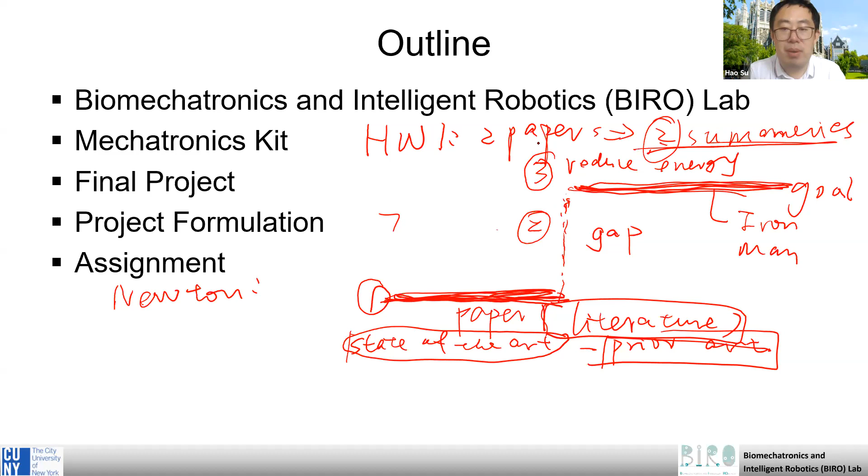Okay, if not, I will move to the next section, and let's go over the details of today's lecture.

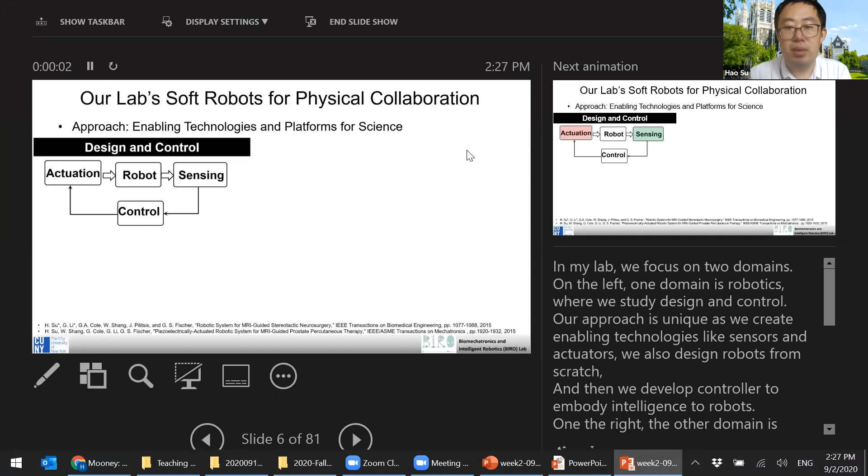And let's go back to the lecture and switch to the view. So you can see, okay. So I want to talk a little bit about my lab research, so you can get some sense of what my lab does, and also it's a representation about the state of the art of robotics, right?

For example, we develop enabling technology and robot platforms. On one hand, when I talk about enabling technology, I mean actuators, sensors, and those basic components, right? And we also work on robot design. We design robots from scratch, right? So we don't buy robots, we design them ourselves. We also develop controllers, which is like a smarter algorithm to make the robot, like some students said, AI powered robotics, right? This kind of AI stuff.

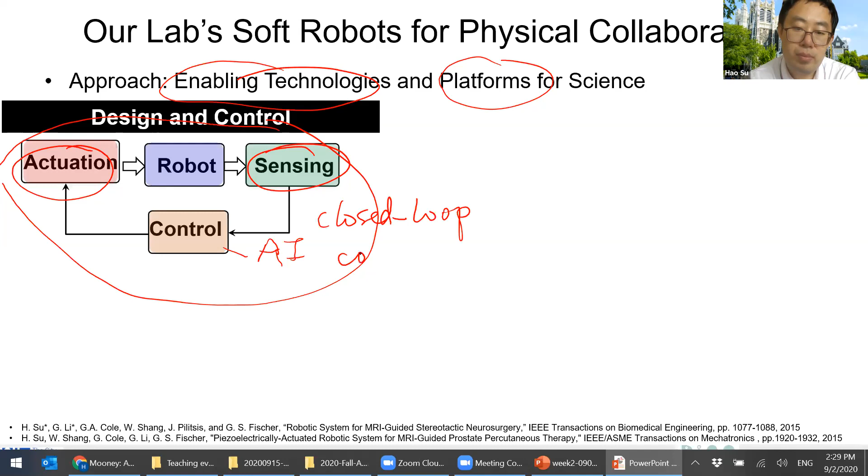So I really want you to remember this diagram, because, do you know what this is called? It's called what? Anyone in 411, do you know what this is called? Do you remember what this diagram is? Any? Is it a box diagram? Block diagram? No. Anyone from 411 know what this diagram is? Anyone else? Most of you learned 411, right? I don't know, it looks like a flow chart to me. It's called motor control, closed loop.

So I think you probably don't appreciate this, right, and you probably think, oh, it's just a flow chart. But for you who already took 411, you should know this is called a closed loop control diagram, also called feedback control, a feedback control diagram, right? What I want to share with you is, I really want you to remember this, because I think this is the most important diagram in robotics and control. When you start to work on robotics, you really appreciate this diagram, because it tells you the big picture of how a robot works, right?

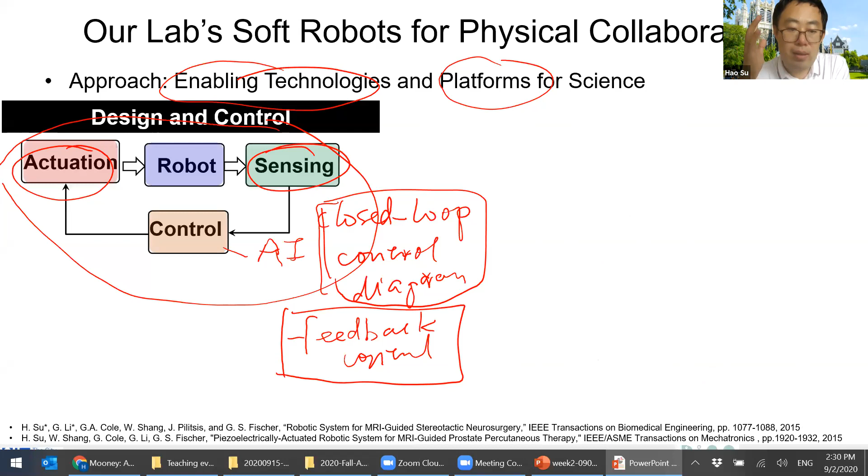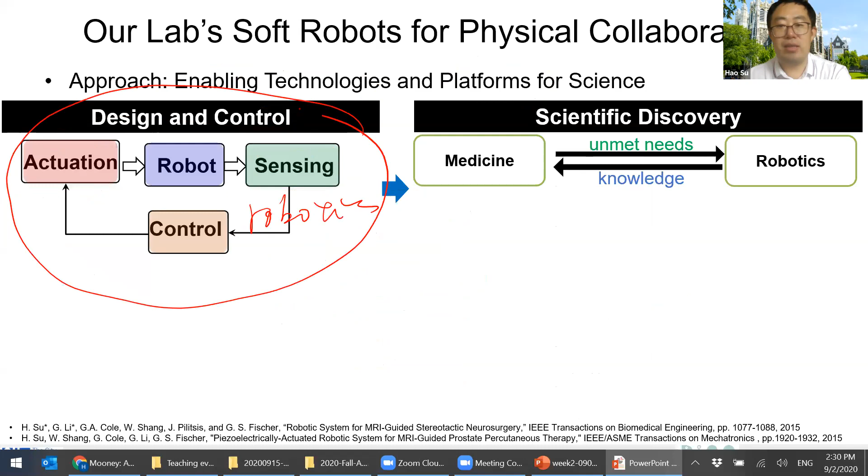So on the other hand, on the left, we see this domain is called robotics, right? This domain. On the right, we call it scientific discovery. So we develop robots, we call them bio-inspired robots, like a bio-inspired exoskeleton, for example, right? And we learn from medicine and understand some problems, right? And I told you, we want to understand the gap, and we develop some robots.

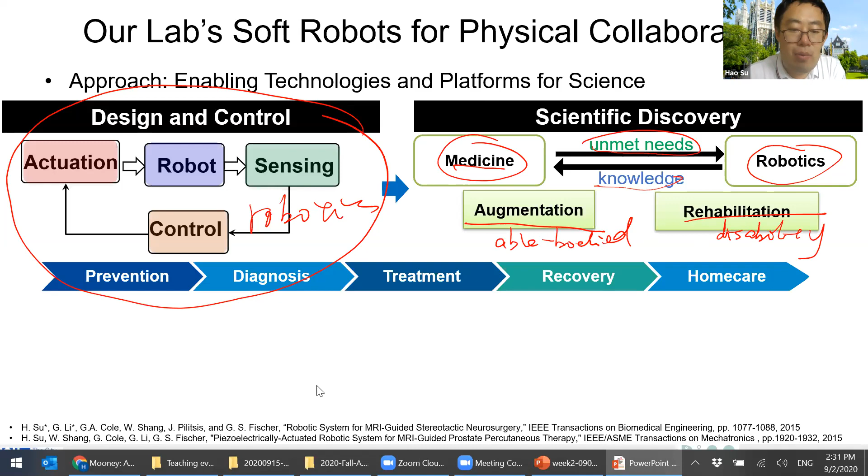On the other hand, we also use the robot as a tool to study, to investigate the medicine, to study how we can do better to solve some medical problem, right? Like help people to walk better. We study augmentation for able-bodied people, and also rehab for people with disability. So that's my lab's task, that's our research. We actually cover a very broad spectrum in the continuum of care, from disease prevention, for example, this exoskeleton, to prevent musculoskeletal injuries for workers.

We also work on an exoskeleton for recovery and home care. We want the robot to be used at home, but right now most exoskeletons can only be used in lab settings. They are not really designed for home applications, so that's a gap in this research area, and that's what we are trying to make better.

We use a soft robot approach, so it's lightweight, more comfortable, for both adults and children. Any question? Okay, so far so good.

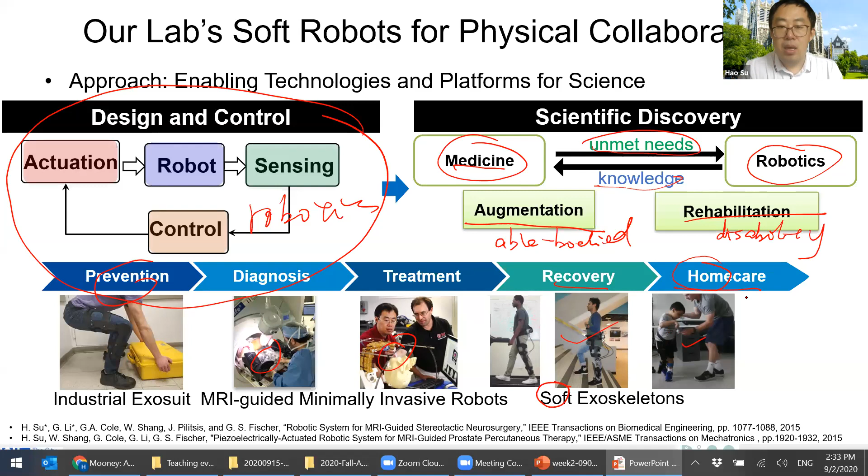We study two types of robot. There are many ways to classify robot. One way is a rigid robot, the other is a soft robot. That's kind of like a simple solution.

This is rigid material robot. I think you have seen some industrial robots - it's a metal linkage, made from rigid components. So it's called a rigid robot.

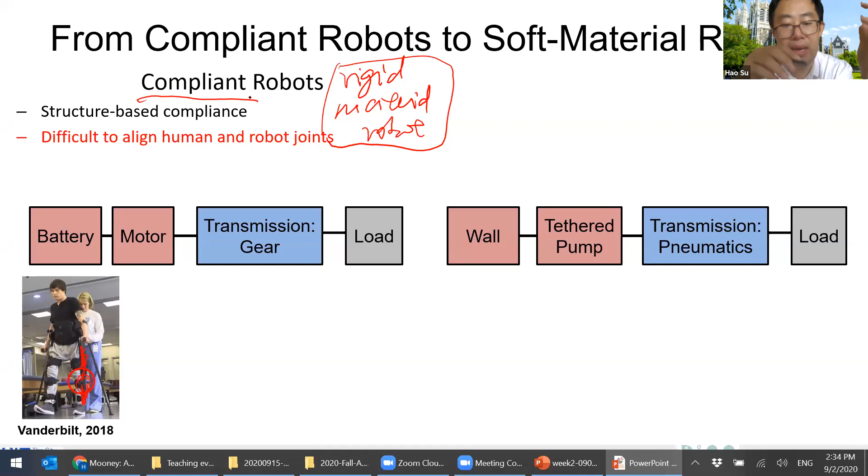But a rigid robot, like this exoskeleton - you can see the person is wearing exoskeleton. This is a linkage, this is another linkage, one on the side, one on the shaft, and then there's a joint here. It's a rigid robot, the material is rigid, but they can be kind of compliant. You can kind of move it, make it pretty compliant. It's rigid, but you can make it behave with some compliance.

Inside this robot we have a battery. In the back, the person carries the battery, also has the motors, and somewhere here the motor is, drives it. Next to the motor, the motor is also attached to some kind of gear - typically a pair, gear 1 and gear 2. This is called a transmission.

In the end, the robot needs to carry a load. In this case, what's the load of this robot? This is the exoskeleton robot. The human? Can you be more specific - human what? The body, the weight of the human? More precisely, someone said the limbs - the human limb. So the load in this case is a human limb, the robot drives a human limb. That's the load in this case.

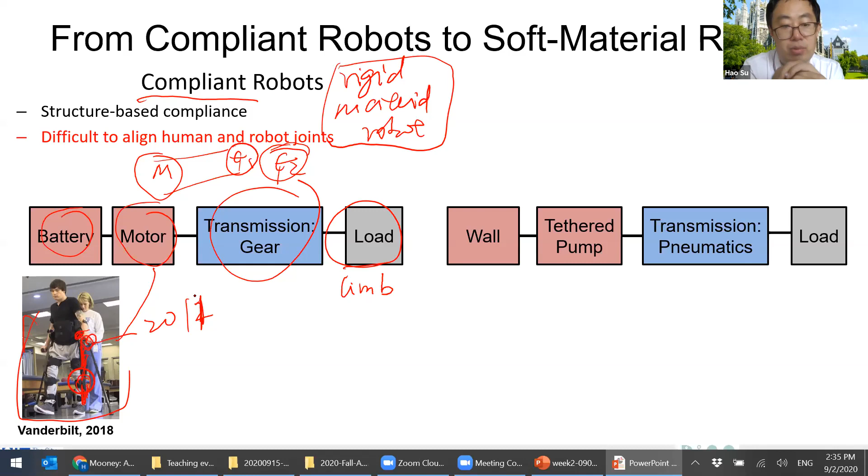But it's certainly a nice robot. It was developed about 10 years ago, I think 2011, around that, from Vanderbilt University. Right now it's a commercial product. This is a recent version, but the original version is about 10 years old.

But there's one limitation. If you think about the robot linkage, and you think about the human joints - what's the limitation? There's something like one problem with this rigid robot. Can you think of some limitation of this robot? You can roughly see the robot - it's kind of like the angles that it can turn.

It won't be about exactly his joints or something like that? Can you say that again? Like it won't be exactly where the joints would be? Yeah, very good, thank you, good answer. So it's difficult to align the human joint with the robot joint. Think about that - if you just attach two metal pieces together with a linkage in the middle, and you attach that to your knee, to attach those two linkages to yourself.

This link and this link, right? These two links, do you feel very comfortable? Very likely not, because it's rigid, and also there's a joint misalignment. It's really hard to align this joint with the human joint. So it's pretty tough to align them together, or let's say it's impossible, because a biological human joint is more complicated than a simple robot revolute joint, right? This is called a revolute joint, so it's just a hinge.

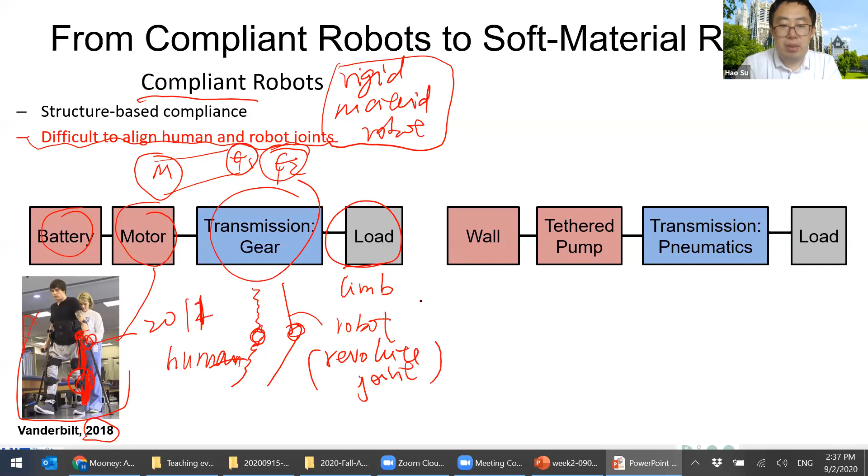So to solve this problem, as I mentioned, there's a second category of robots, it's a soft robot, using soft materials. Because the material itself is soft, we can use rubber, fabric. This is the most popular research area in robotics right now.

For example, in this case, this kind of crimson color, red piece is made of a rubber elastomer. This robot, it's not very easy to see, but it's kind of like an air bladder, like a balloon. So it's a balloon-based robot.

So why does this kind of robot have this issue? Why is this not good, but this kind of robot is good? Do you know why? There's no joint misalignment issue. Any idea why it has this nice property, why the soft robot doesn't have this joint misalignment issue?

It's malleable. It changes shape. Yes, it changes shape, but why? It assists the movement of the person. Yes, but it's elastic. Yeah, elastic is one reason, but could it be more specific? The material characteristics of this material are better than the other one.

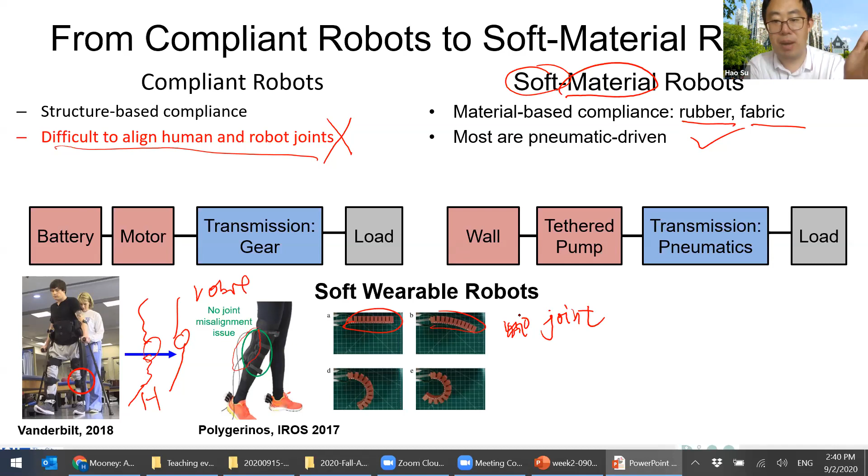So by thinking of this, if you look at the state-of-the-art soft robots, there are many different kinds. Anything that you can imagine as a rigid robot, you can essentially make a soft robot version. But there are several major limitations of those robots.

First, you see, it has a pump here - a big pump - and it needs an air pump to drive it. And here is the air hose, so to drive this. The second limitation of this robot - what's the limitation?

Can you see the limitation of this kind of squishy crawling robot? It doesn't seem like if it were to have a load vertically, it wouldn't be able to sustain it. Right, because of the weight - it's weak, and also it's slow. If there's any emergency and you want the robot to come do some rescue, you probably don't want to rely on this kind of robot - it's too slow. So that's exactly the limitation of those robots.

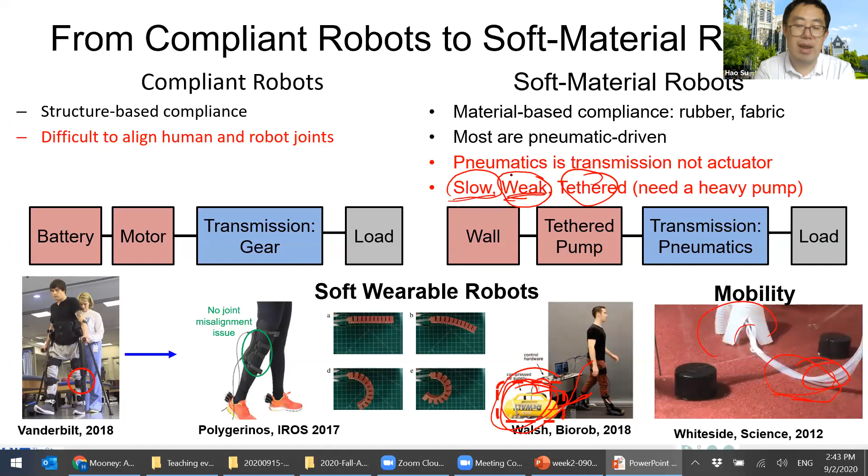So the first limitation is tether - they all have a tether, and it's slow. It's slowly crawling, and also it's weak. Those are the limitations of soft robots.

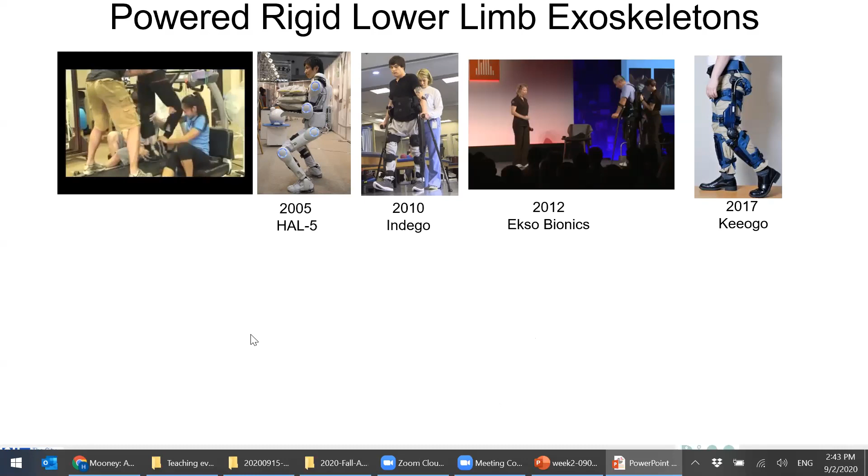Perhaps because some people that are disabled don't have the physical strength to be able to move and use the one on the far left. So the one on the right, I guess, would be a precursor to the one on the left. Yeah, so that's one benefit, right?

Another benefit is, in this case, how many people are here to help the person to move? Three, right? You know, it's expensive, right? And also it's labor intensive, and you can only do this in a clinical setting, right?

And this is also true for this - you can only do this in a clinical setting, right? So that's why we prefer a robotic device, right?

So robots have some benefits. If we can use the robot to do this, we probably only need one physical therapist to work with this person in this case. And you can see the video, right? This is still kind of like state-of-the-art research, and even though they're not very new, they generally show that.

So this is bad, right? We don't want to do this. There's too many people, and it takes too much time. You need to go to the hospital and clinics to do the rehabilitation.

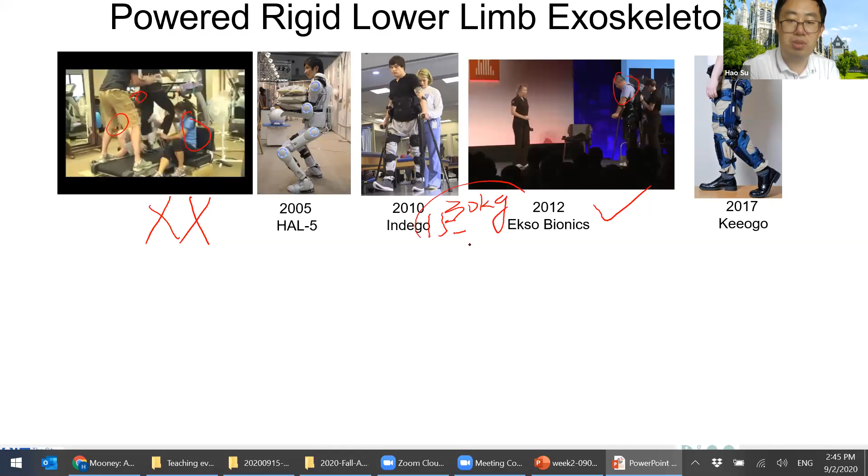And here, this is better, but only one person, maybe two people. This is kind of okay, but you still - this is about 30 kilograms. The robot mass ranges from 15 kilograms to 30 kilograms, that's like 30 pounds to 60 pounds. Super heavy, right? So this is not good.

So this one is a modular design, only has a knee joint. So this is lighter, but it's still about 10 kilograms. So you can see it has some advantages, but the main disadvantage of this robot is that it actually costs more energy for people to walk. So this is the problem.

So we want to reduce the metabolic cost, we want this energy, the energetics, to be small. But for those robots, there's no metabolic cost reduction. So those robots are like exercise machines, actually making your walking more difficult. It's only useful for people who are fully paralyzed - they cannot walk, so for people who cannot walk, this is useful, because the machine can walk for the person.

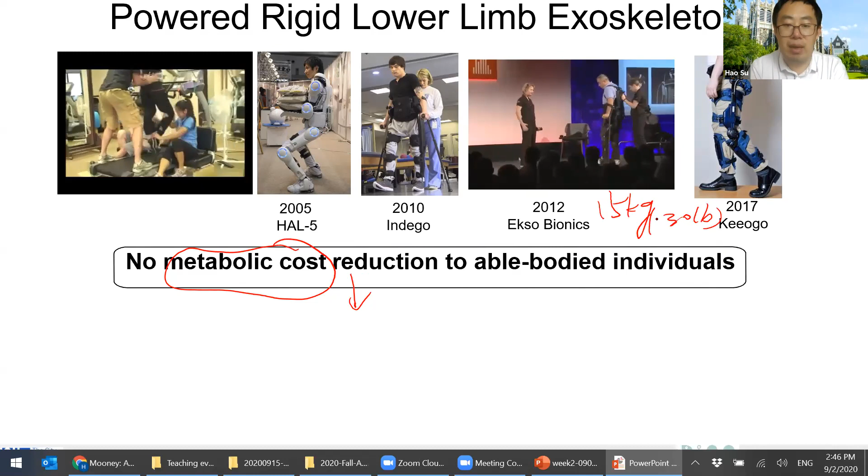But if you wear this kind of, let's say, 15 kilogram and 30 pound robot, wow, that's too heavy, right? So what are the key challenges? I think it's too heavy, too much friction. So when you wear it, you can barely move the joint, right? So the robot is not compliant.

So by this, I mean it's not compliant - you can feel a lot of friction from the robot. And the robot only moves when it's powered, right? So that's the limitation. And also we mentioned the joint misalignment issue. And then in terms of control, it enforces the person to move around, so that's also a limitation.

Enforcing the person to walk - it's not nice, right? We want to assist the person to walk. We don't want the machine to walk for you, we want the machine to help you walk. So that's kind of a minute difference, but it's very, very important.

In my lab, we develop several exoskeletons - sorry, let me reshare this video with you. So we develop several exoskeletons, and we really want to optimize a lot of features.

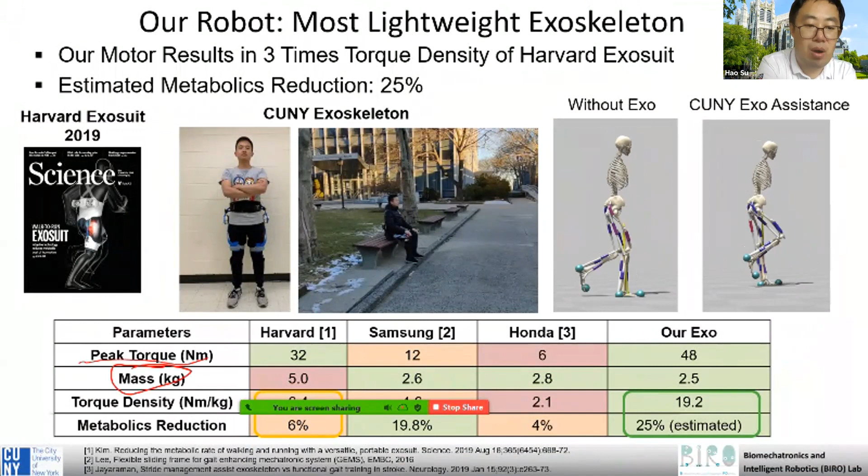So the number one thing is we want it to be really, really lightweight, so people can wear this robot at home. So lightweight, and the metric we use is the mass. We want it to be lightweight, but we also want it to generate some torque - a sufficient amount of torque to help people walk better.

And so it's not only the mass, but we also care about normalized torque - we normalize the torque by the mass, because for each kilogram of the robot, we wanted to maximize how much torque it can generate.

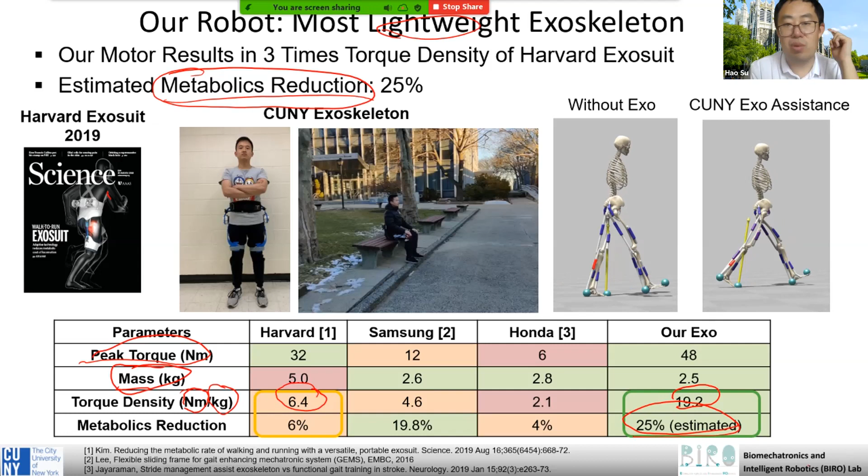So essentially we make this really lightweight, and that's the goal we want to achieve. The end goal is that we want to reduce the metabolics or energetics. We predict that our robot, because it's about 3 times the torque density compared with this robot from Harvard University, can reduce about 4 times the energetics in comparison.

So let's watch a video. We have invented a hybrid exoskeleton that is softer, powerful, and smart to help patients regain mobility.

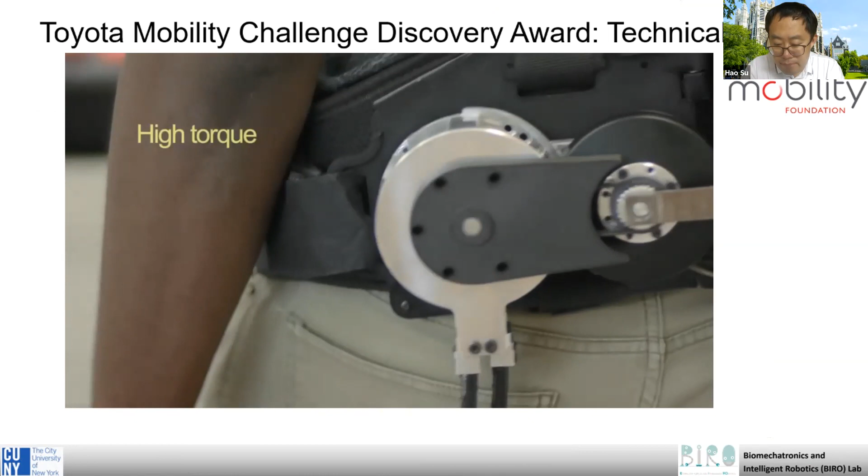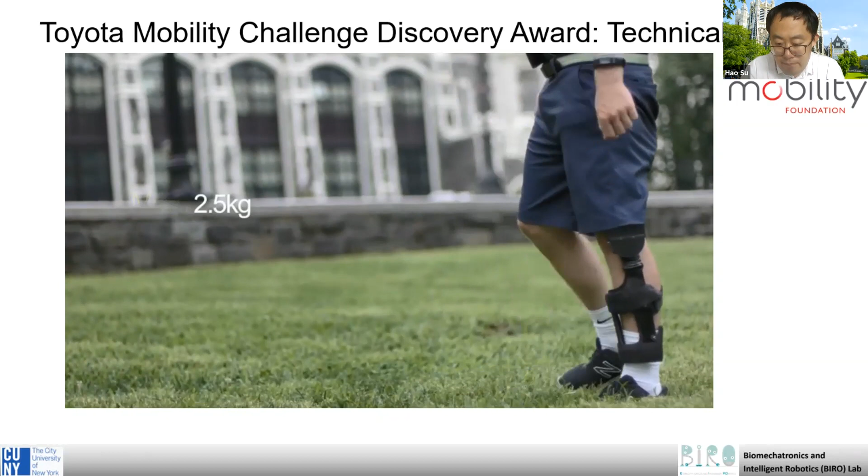Our robot combines the advantages of rigid exoskeletons and softer exosuits. Motors deliver power through soft cables to wearable structures to assist both flexion and extension motion. This is the first exoskeleton that is ultra lightweight with near zero resistance to human motion, thanks to quasi-direct drive actuation that uses high torque motors with small ratio gears.

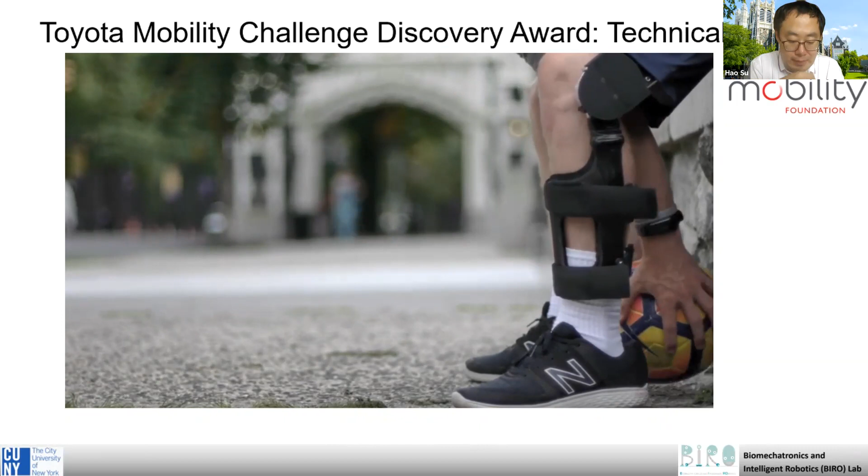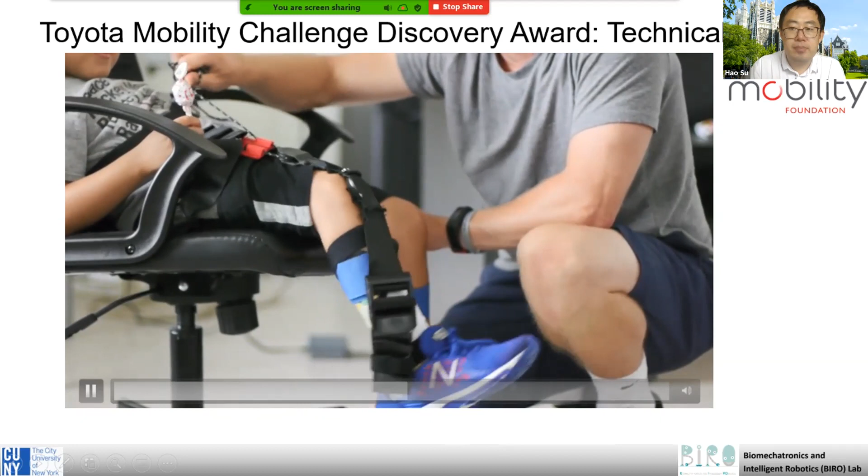The variable part is customizable using 3D scanning and 3D printed carbon fiber. Therefore, the robot fits the user very well, and it can be worn under clothing. Besides the adult exoskeleton, we also invented a pediatric version, which is purely textile-based and mimics the quad muscle. The raw material cost is under $50.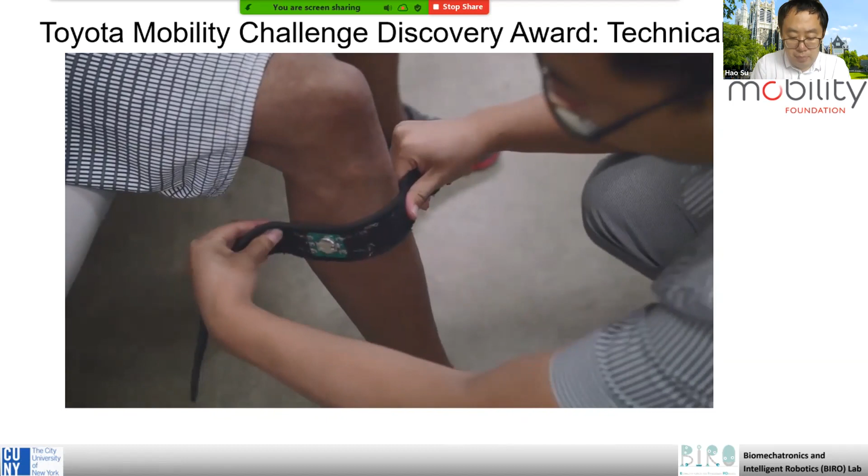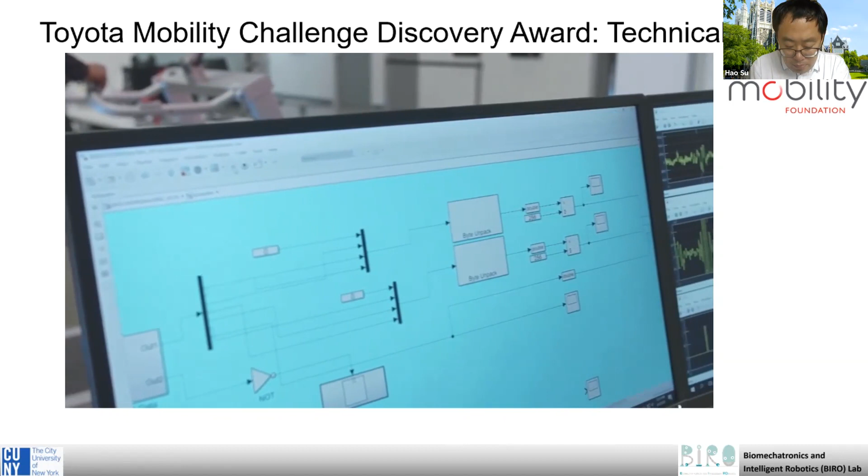Our medical center is the clinical collaborator with Dr. Su's lab. Soft EMG sensor technology is a human-machine interface that monitors the user's physiology and varies the power assistance by maximizing the use of residual or remaining function. Our group plans to conduct safety and efficacy studies to investigate the usefulness of this technology.

This new robot offers a suite of important enabling technologies, from sensors and actuators to AI, for a variety of patients with lower limb paralysis. The most promising aspect of this innovation is not only the technology itself, but the translational value, the potential for affordability, and the way the device will encourage user independence.

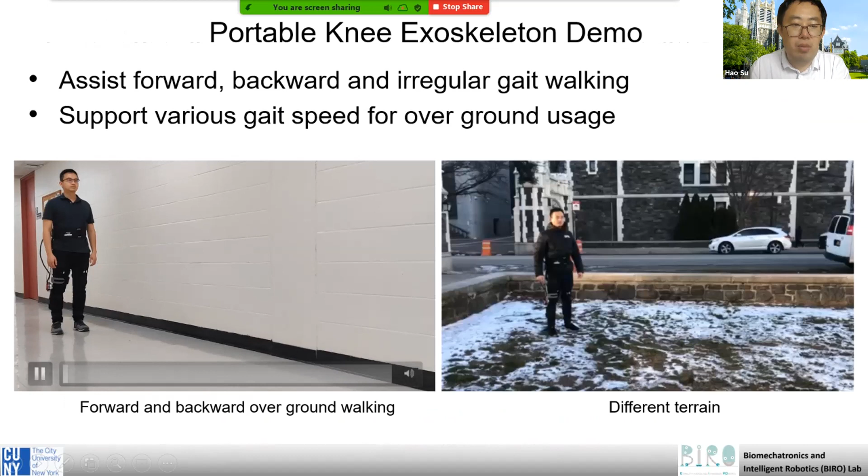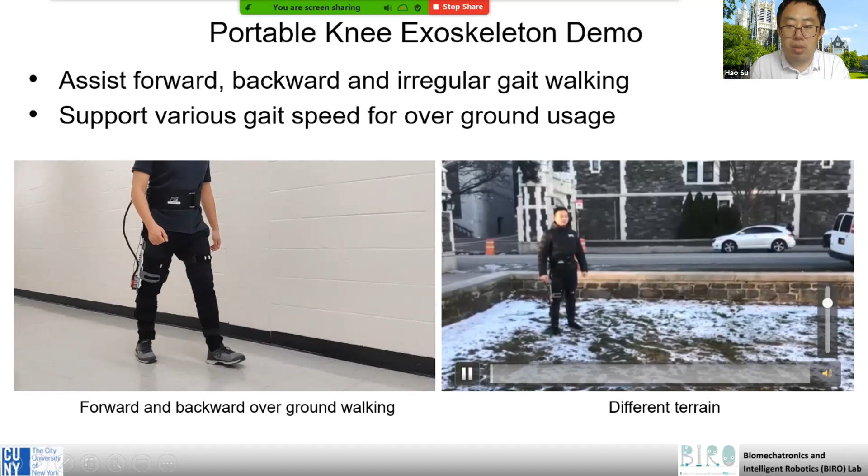I hope you get some sense of how the robot works. We also have this portable robot that can move forward and backwards when it's powered, and it can walk on a couple of different terrains, so different home-based applications.

So then I want to switch to talking about mechatronics education. As I mentioned, we really promote project-based experiential learning, and we developed this open source mechatronic kit and also a website.

We are also developing 3 soft robots, including this soft robot hand, robot cheetah, and an underwater soft robot. If you go to this website and Assistive Robot Toolbox, you can see related information, or you can go to my website, and I have the link to this website.

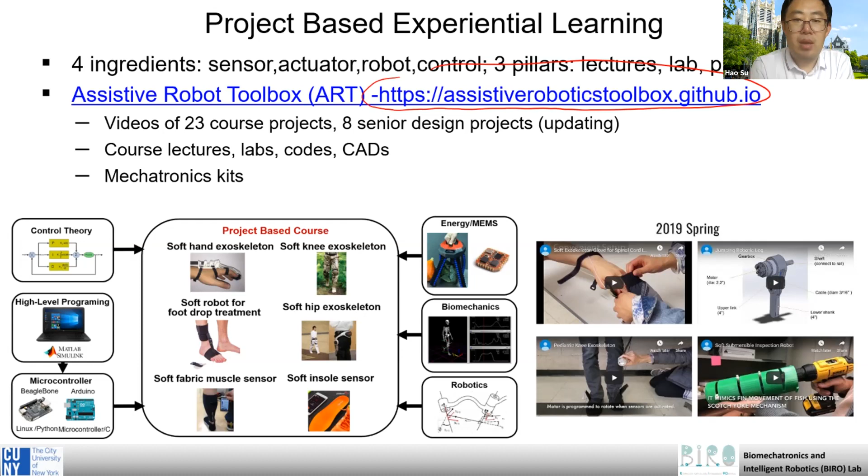In the last few years, we received a lot of awards, including international and national awards. So more than welcome for you to submit papers or competitions.

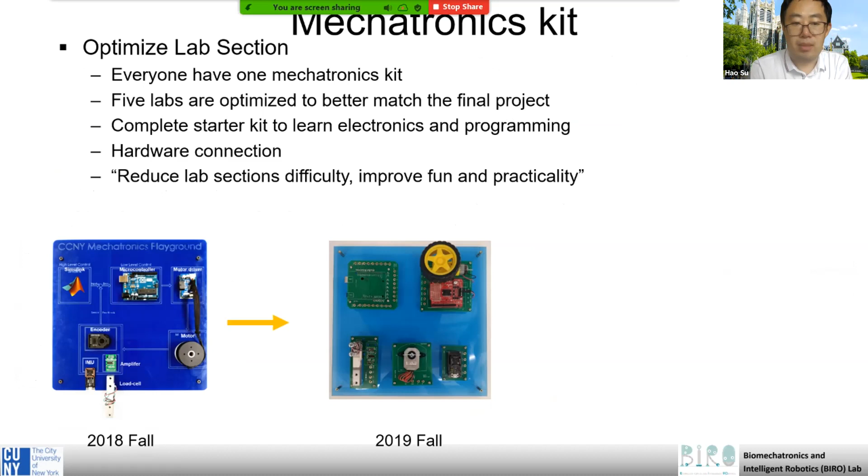And then I want to talk about the Mechatronics kit. This is our first version. The second version we developed last year is modular, so this is the modular version.

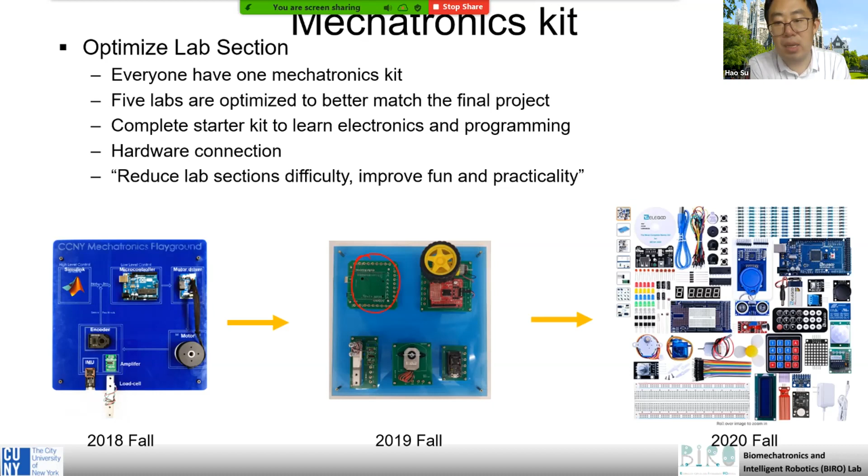The current version uses a kind of commercially available kit, but we came up with a very smart idea to do some of these kinds of products. You can do it at home.

Some nice projects we did before, for example, this origami robot. We call it an origami robot that is a foldable robot that can generate a high force. It's a high force soft robot.

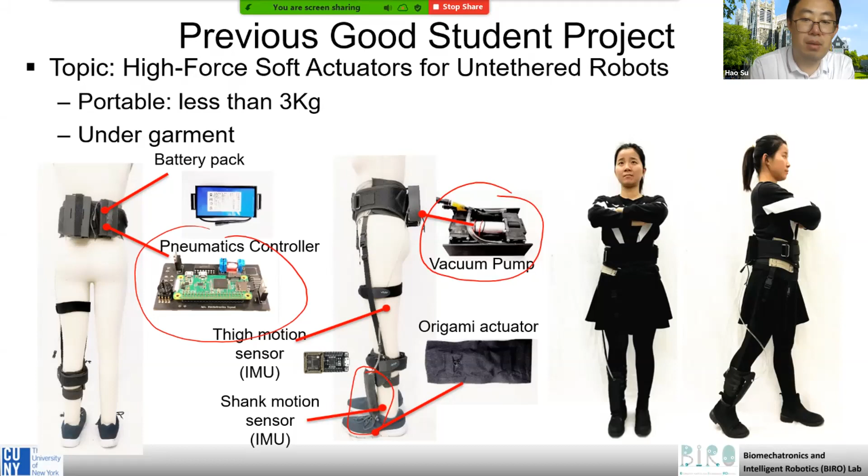Also, we use this robot design like an exosuit. It's soft because this structure itself is made of fabric, and it's pneumatically driven. We made a vacuum pump so it can draw air, and the students even made a custom circuit board, a very nice system.

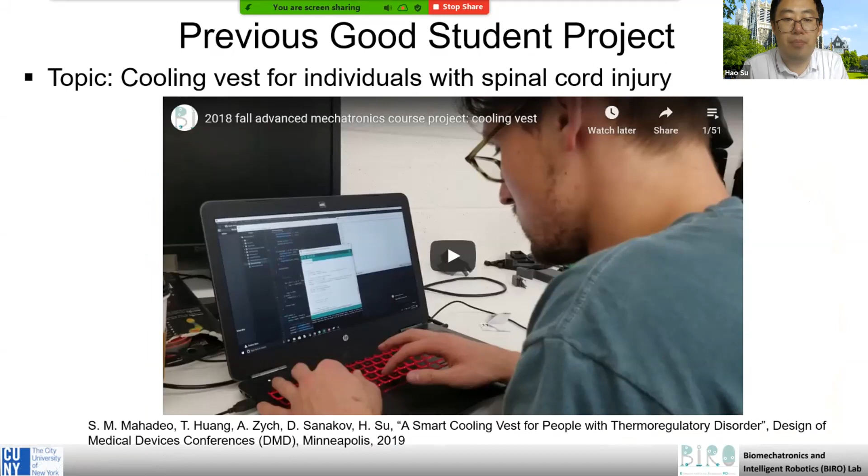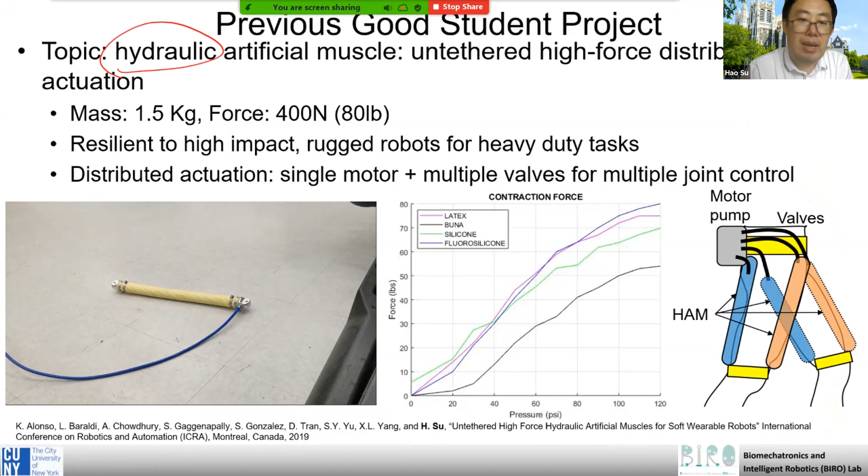If you go to the website, you can find related information there, and there are several products on the website. Another product is a hydraulic artificial muscle robot product. It can generate really high force but is very lightweight.

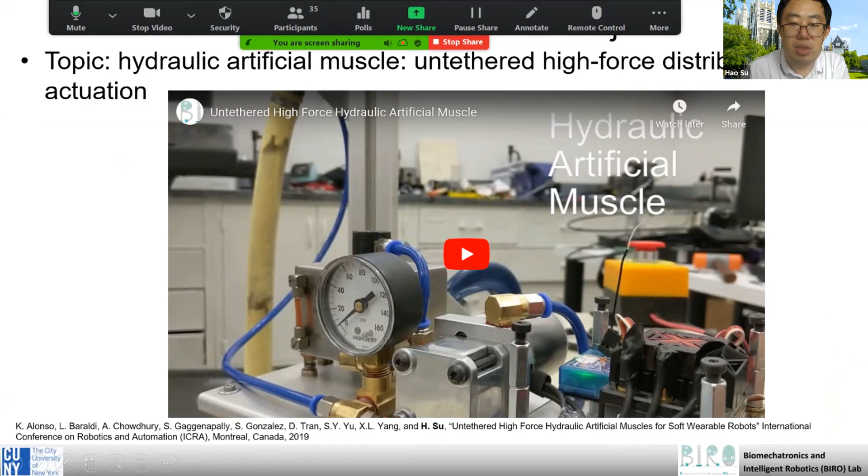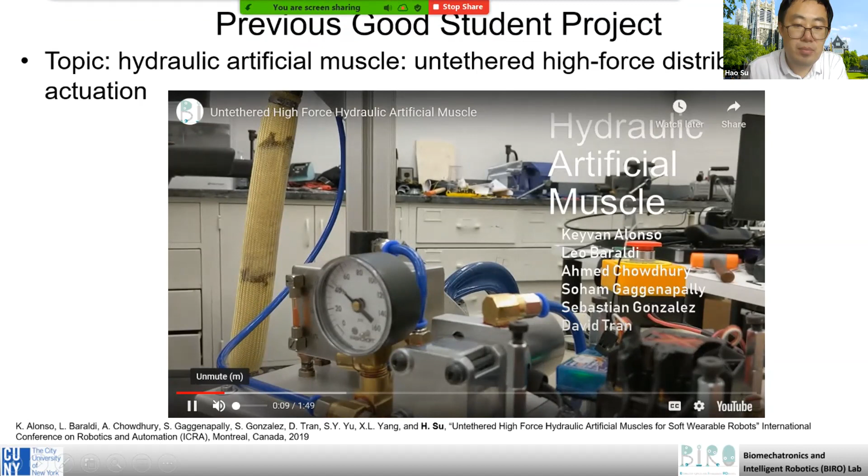This is another product, kind of an early version of this product. Let me briefly show you this video. Students designed this last semester. Any question?

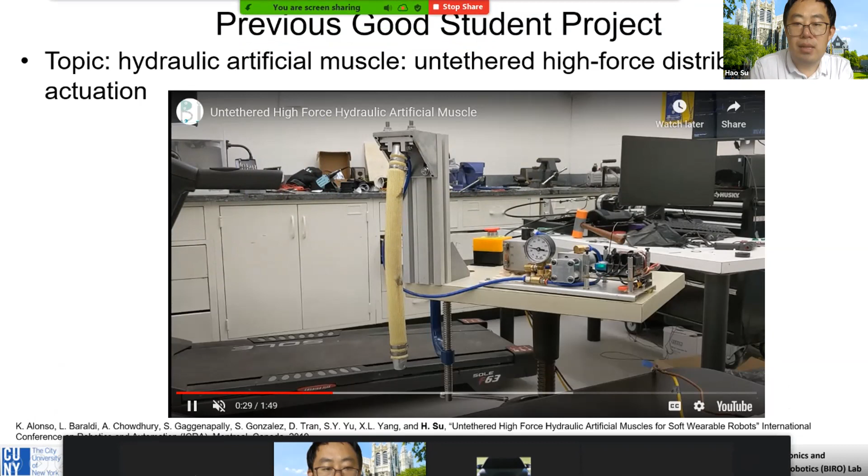So they designed all those pumps, and there's also a microcontroller on the right side here. You can roughly see a microcontroller. They designed the microcontroller, developed the coding for it, designed this hydraulic artificial muscle, and integrated all components together.

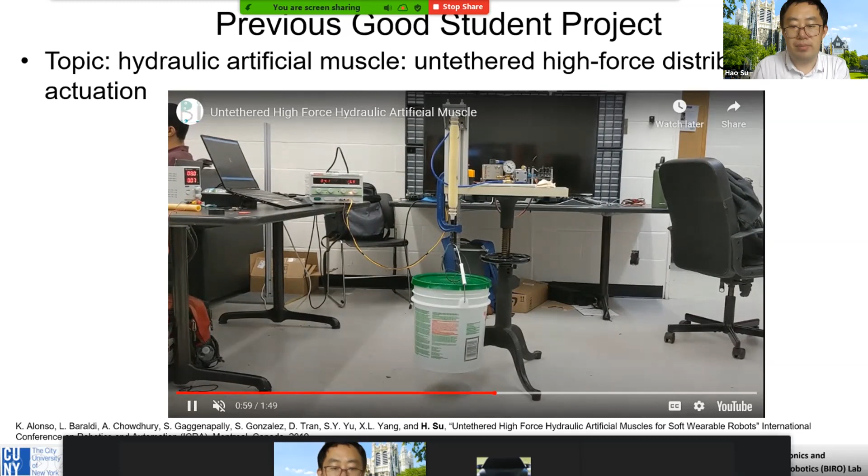So they show that it's very capable to generate high forces with this robot. They also made some very impressive demos. I'm really proud of this team, what they did.

So what you will do for this year, we came up with a very clever robot product: a powered elbow exoskeleton. It's a printable robot, so you can 3D print the hardware, and you will learn about motors, torque sensors, position control, torque control, and a virtual wall controller. This is Mechatronics, this is a controller, and also using inertial measurement units, IMU sensors, to detect human intention.

So I think it's really a cool product that you can learn something new from, even doing remote learning.

So you will design the elbow exoskeleton. You need to practice SolidWorks - this is one thing you need to do. Also assemble and test the exoskeleton. So we prepared several labs so you can do that.

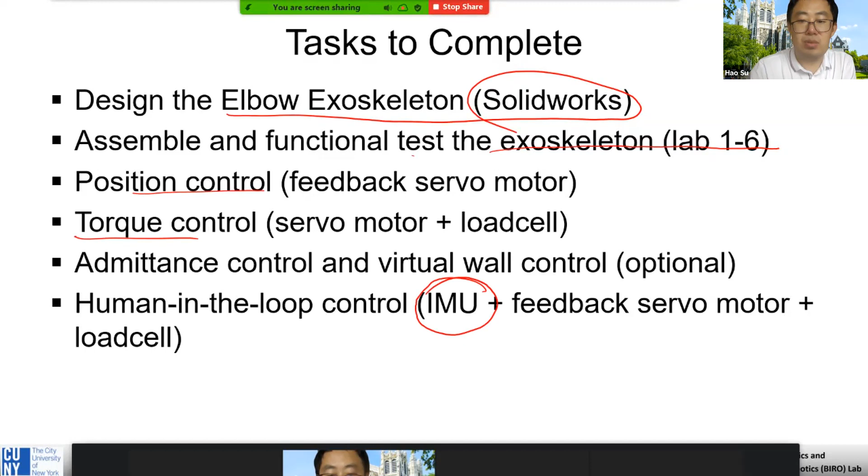And we will teach you how to do the position control and torque control of those robots, and a lot of different new controllers. We'll also teach you how to use the IMU sensors to detect human intention. Feel free to attend competitions or submit conference papers - whatever cool opportunities you can learn from previous year's projects and competitions.

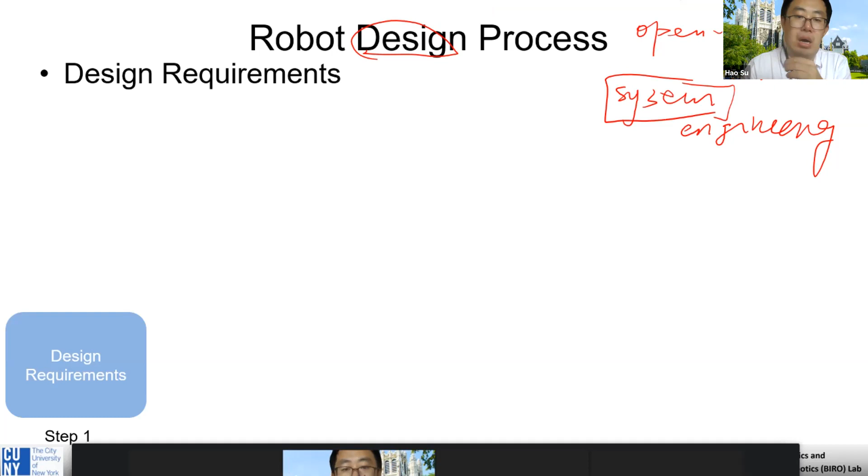But I think it's like systems engineering. By system, I mean it's not one component, it's not you design a mechanical system only - it's not one component, it's not two components. It's a mechanical system, electrical system, and also computer science. You need to combine all those three domains together. So I think that's the challenge, how to do that.

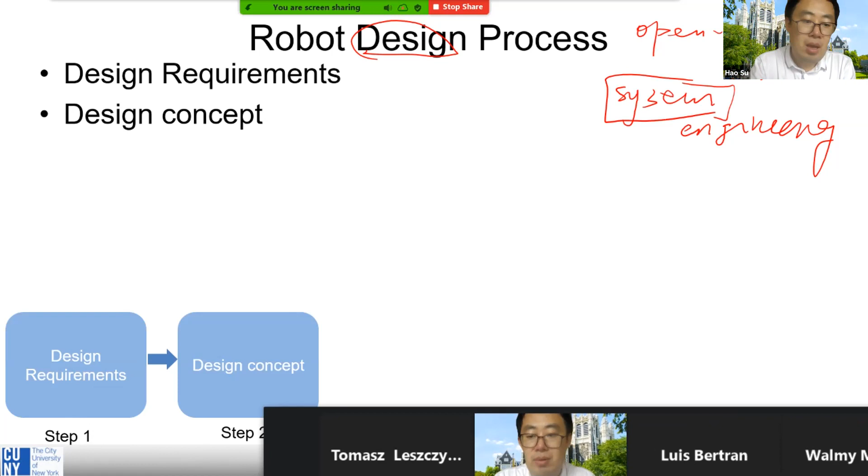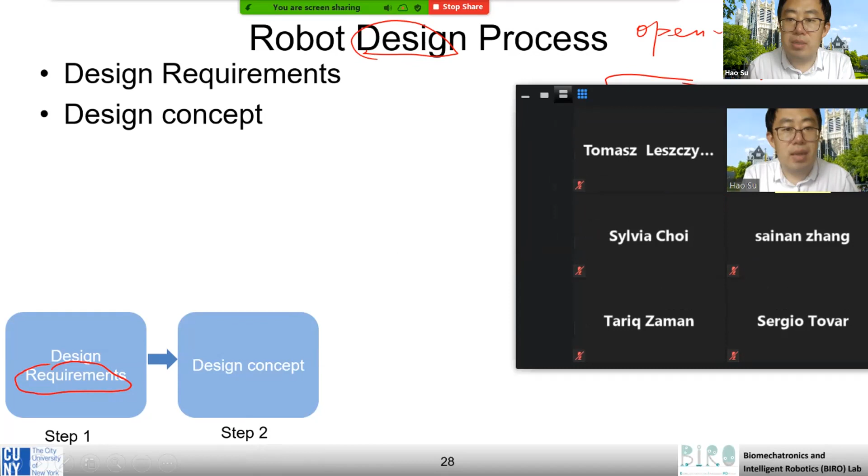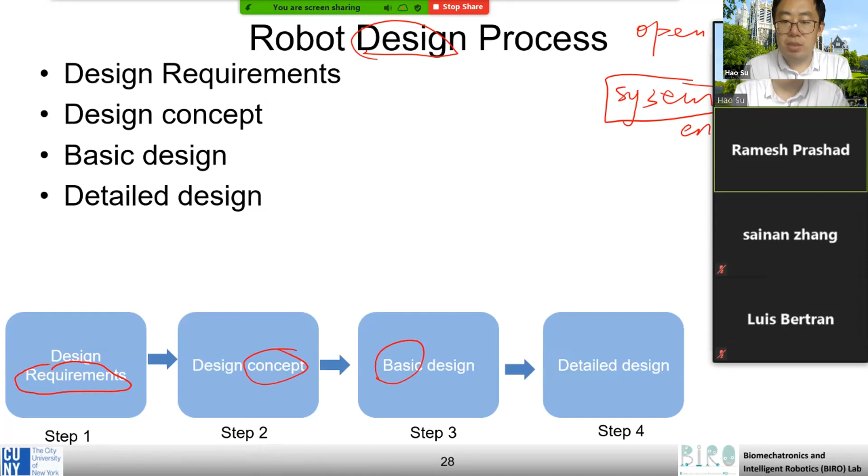So I think all the projects should start from design requirements. Understanding the design requirement is super important. And the second step is to understand - let's see, you will have some concept, then you come up with some basic design solution, then you come up with some detailed design solution.

In the end, I think you will do the manufacturing. But before you do the manufacturing, you need some approval from me so we can print the robot for you. But the caveat is I do not want you to just tell me, okay, I want to print this - I think that's not good practice. Don't jump to this detailed design directly. The right step is from step 1, 2, 3, 4, then continue until the last step, the system integration.

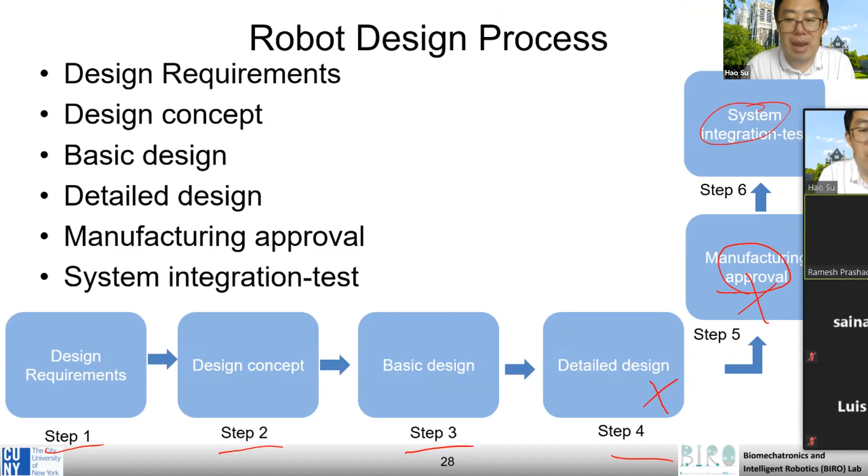So that's the key idea, and I think this maybe sounds simple, but many people still don't quite understand that - even many of my students, my postdocs, they don't quite understand how to do system design. So I will ask 2 students to go over this slide and explain what is in this slide and why it's so important. I think this order is super important for managing any robotics projects, and it's super useful for you to go over these steps.

Can 2 students - I need 2 volunteers, maybe one by one - go over this slide? Can someone go over this slide?

Ramesh, can you do it? I need 2 students. Do you just want people to read from it? Not really read, right? Based on your understanding, explain this slide, right? Luis, can you explain it? Perhaps I could try. Yeah, give it a try, please.

So for design requirements, it would be like what you need the thing to do. Right, so all the necessary things it has to do to actually be helpful or work. And for design concept, it's more like an idea of what you can do to make the project work. Like you can use this, you might be able to do this.

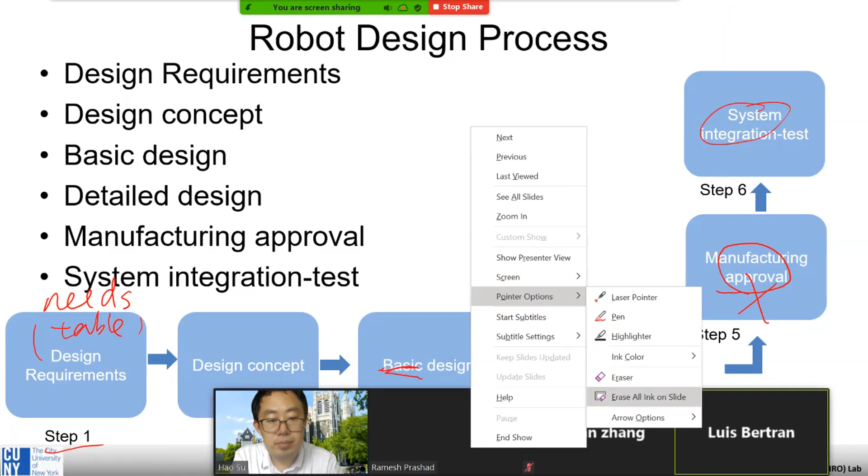And then for basic design, it would be like taking one of those concepts and trying to work something out, an image, maybe a design for it that can work, but you're not sure of yet. And then for the detailed design, you go more into the basic design, work out how that's going to work, further the design so that it satisfies all the requirements.

And then for manufacturing approval, I suppose we gotta ask you or other people that know how to do it if it's possible to be manufactured, or work out a way that you can get it manufactured. Then the system integration test, I'm not really sure about that, but it would probably be the testing, maybe programming or anything that might need it. And that's basically all I got on that.

Okay, very good, thank you. So I think the key idea is don't jump to the detailed design, right? Don't do this right away. You should start from the beginning, really understand the requirements, right?

No matter if you do this project or go to a company and work on projects as an engineer, I think it's super important to know the design requirements, right? You want to make a small robot, a large robot, the robot for an older person or a young person or a child - they are not the same, right? Don't just assume, okay, I roughly know the design.

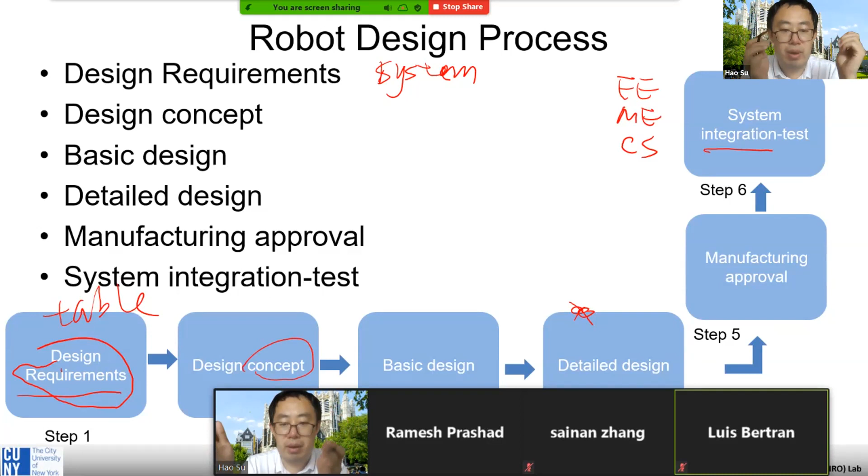But when I talk about the design concept, how can you do the design concept? What software can you use? Can someone tell me what software you can use to do the design concept?

You can use Simulink. Okay, anything else? SolidWorks. Yeah, SolidWorks, anything else? What other software do you think could show a concept, a basic drawing? What can you use? AutoCAD. AutoCAD. What about PowerPoint?

So for example, if I want to design an elbow exoskeleton, you can draw something, right? A linkage 1, linkage 2. You can draw something like this. And because this is a rigid linkage, you can draw this linkage 1 and linkage 2.

And I probably ask you one question: where do you want to put the sensors, right? So you probably will tell me, okay, if this is a robot - for example, this is a robot, and this is a human joint. This is a human, so this is a human arm. Let's say this is a human.

So you can attach this to the human through some Velcro. But where should you put the sensors? That's something you need to design. You can put a sensor - let's say this is a sensor, a rectangular shape. You can place the sensor on top of this robot, or you can place the sensor on top of the human arm, right? So there are many options.

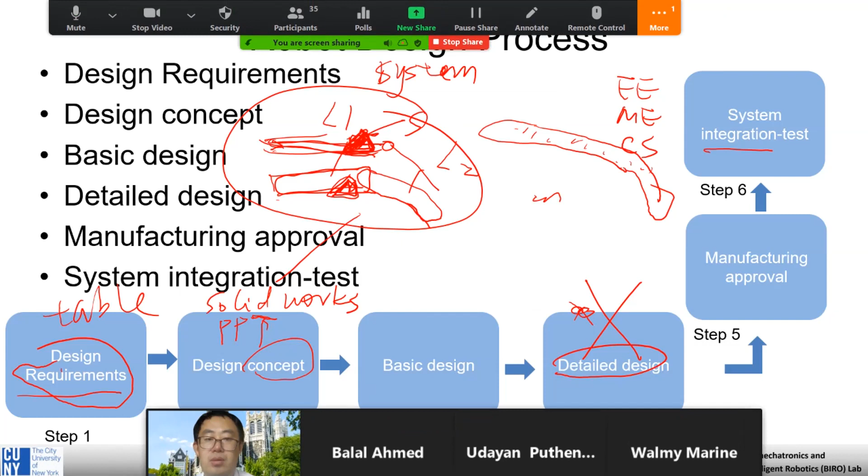Hey Professor, quick question. So you're saying you're going to 3D print this for us? Yes, so we send the drawings to you, and then you'll 3D print it.

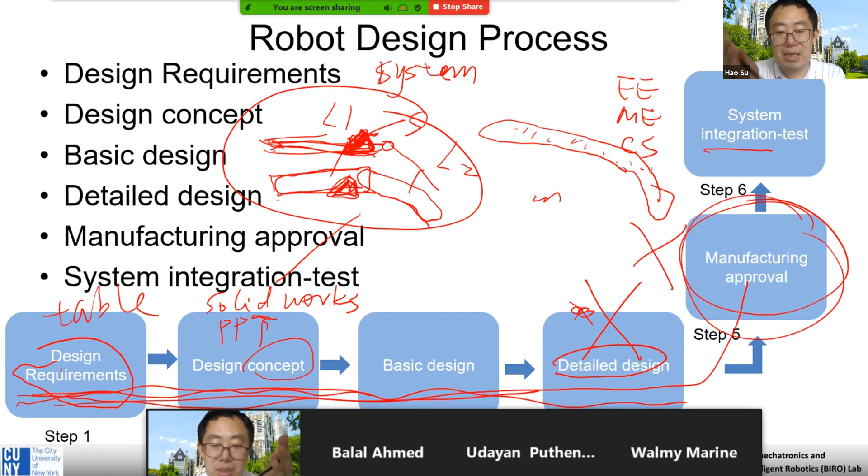Go through the design steps. Maybe I'll change my mind, maybe I want one student to really explain this. Sylvia, can you explain this diagram?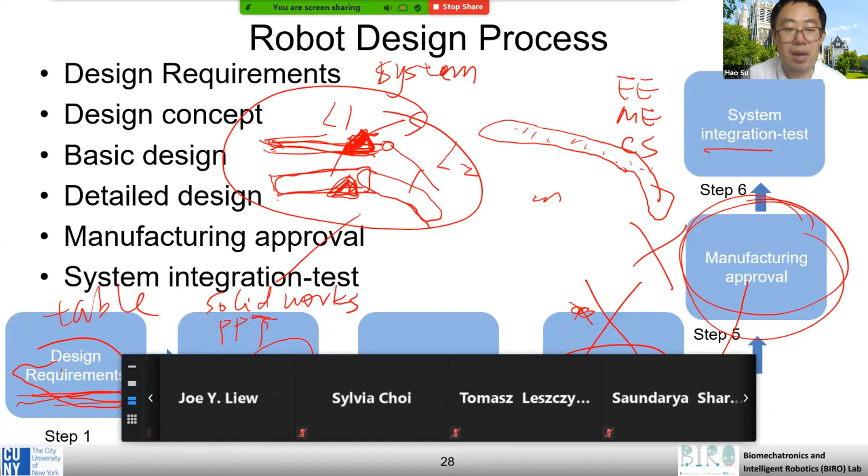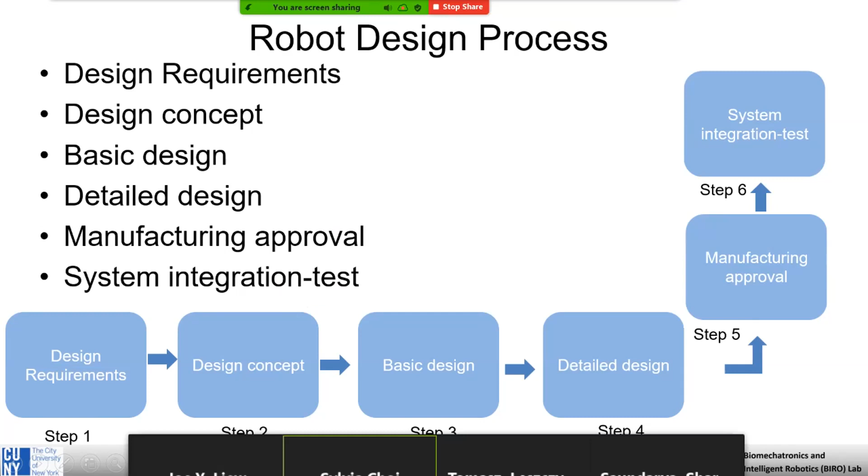Sure, yeah, okay. So first, since this is an open-ended project, we had to choose the user that we're going to design for, such as a child or an adult. And then we can also make up other design requirements, such as the cost or the size.

And then the next step is to consider the design concept. So after doing some research on the background and ideas, and learning a little more about the foundation for this class, we'll draw a simple concept design using either SolidWorks, PowerPoint, or AutoCAD. And then for basic design, we pretty much add on to that.

And when we go into detailed design, we'll consider manufacturing drawings that include fasteners and other components we may use, such as a microcontroller. And then after making manufacturing drawings, we're going to compile a report to send to the professor with all the previous steps to get manufacturing approval. However, in the report we also need to include a plan for the system integration test.

After manufacturing approval, we'll get the 3D printed prototype, and then we can do a system integration test on it. Yeah, very good.

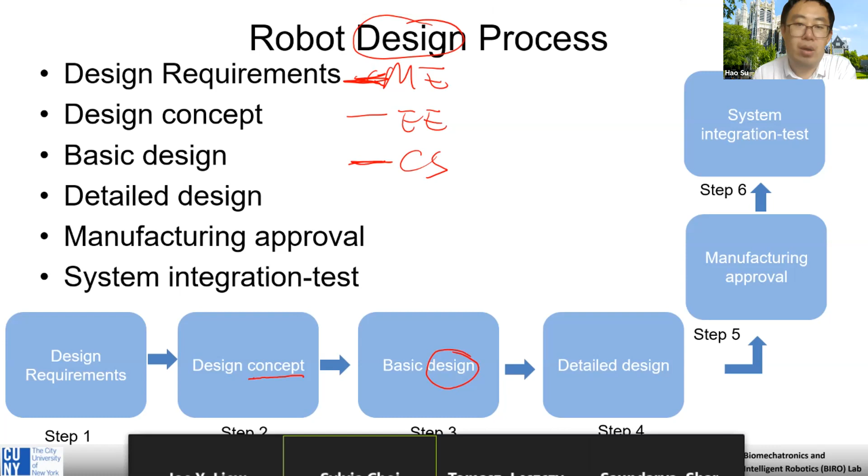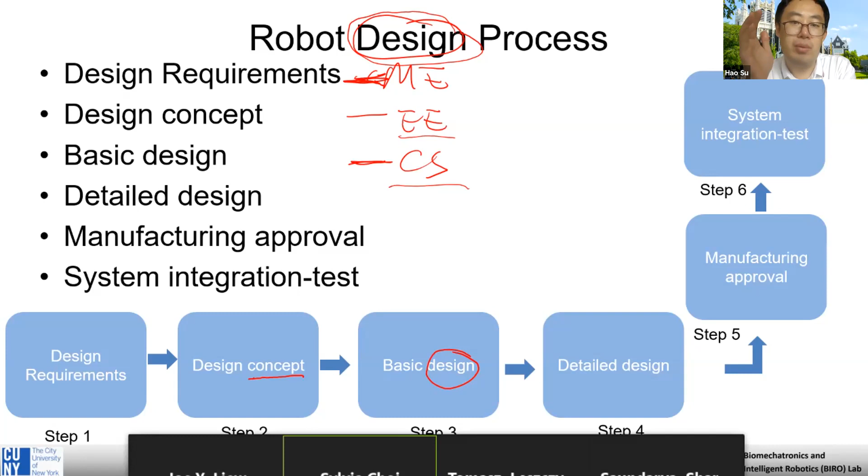Thank you. So I just want to make it very clear, when I talk about design, this is not only about the mechanical design. This includes mechanical design, electrical design, and computer programming. So we will teach you all the steps. Don't panic, and keep in mind robots include three components: ME, EE, and CS.

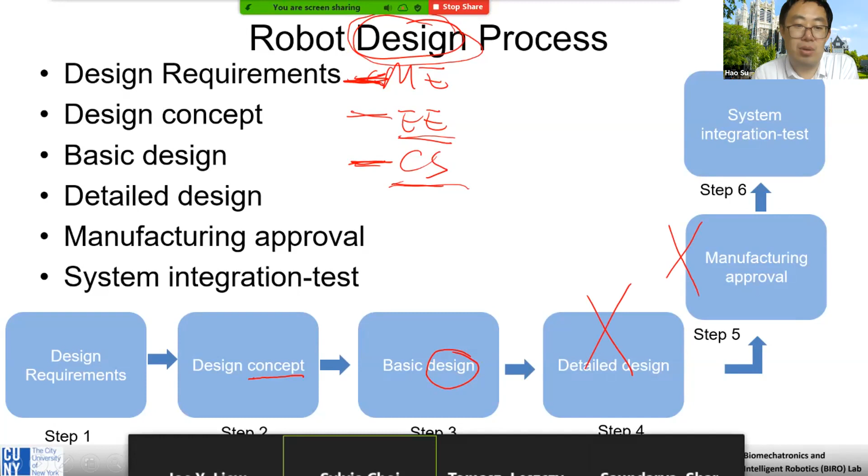So that's kind of a challenge, especially for ME students. You need to understand some EE stuff and also some CS stuff, but that's also very interesting for you to learn something new. And again, don't jump to this first. I've been repeating this several times, but I'm pretty sure some of you will keep doing it anyway, so try to avoid this, okay?

So are we, sorry Professor, are we putting, I guess that's what the next slide is, are we putting deadlines on when we need to be done with what? Okay, I guess you're going to go over that.

So we set up some milestones. We will go over some milestones with you. For example, we will start the project, and then you will do some background research.

There's a university in Switzerland that already made an exoskeleton called EDU Exo. You can go to their website, but we are actually improving their hardware, so we are having our CUNY version. Feel free to check that, but I just want to let you know.

So this is the rough plan. Any questions? Feel free to talk.

If you have your own 3D printer, feel free to print it, it's better you print it by yourself. But we have to do an individual project, to be fair. I know some of you are probably working together in groups of 3 people, but I cannot ask all students to work together, so we can't have some people individual and some people in a team.

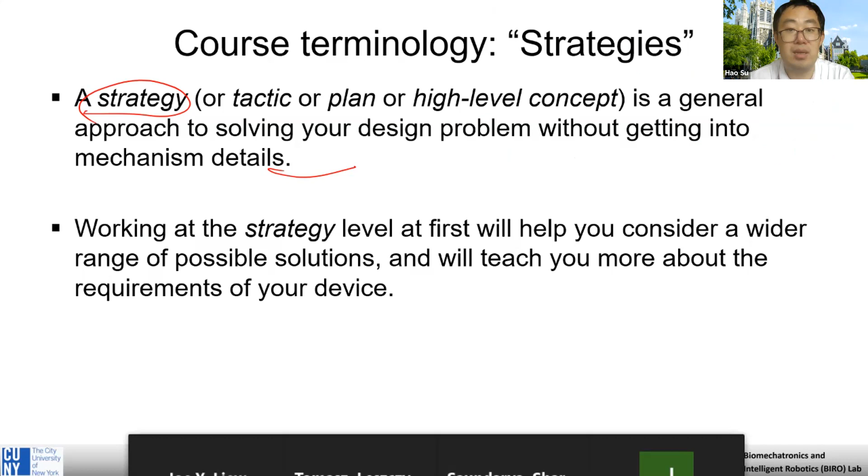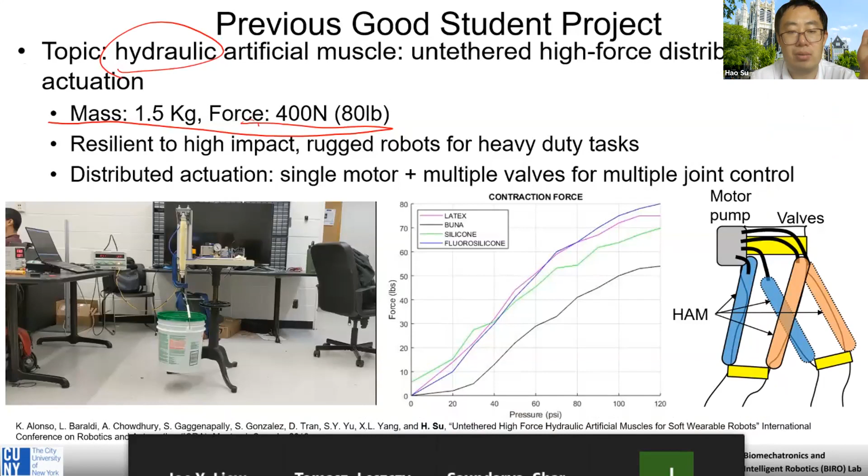I think I'll probably skip this because I can cover it in the next lecture. I already talked about it a lot, but I still want you to think about your project strategy. Even though it's an elbow exoskeleton project, there are a lot of components you need, and we probably even need to buy some screwdrivers for you. So really think about how you can make this product work.

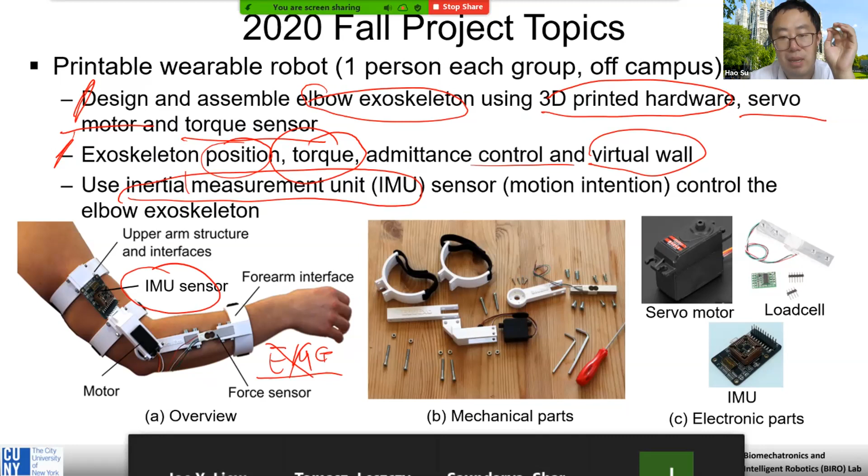Our default version uses motion sensors to detect intention. If someone wants to use a muscle sensor called electromyography, EMG sensor, that's okay but not quite encouraged. My point is you can do whatever you want, but I generally don't encourage this because it's an individual project and I cannot meet you. It's kind of hard for me to debug a hardware problem at your home, that's almost impossible.

So basically, let's follow the same project together through different labs, about 6 labs. When I talk about unmet needs, for each project you can think about the requirement, the state of the art, so this is a gap, the step model, the staircase model.

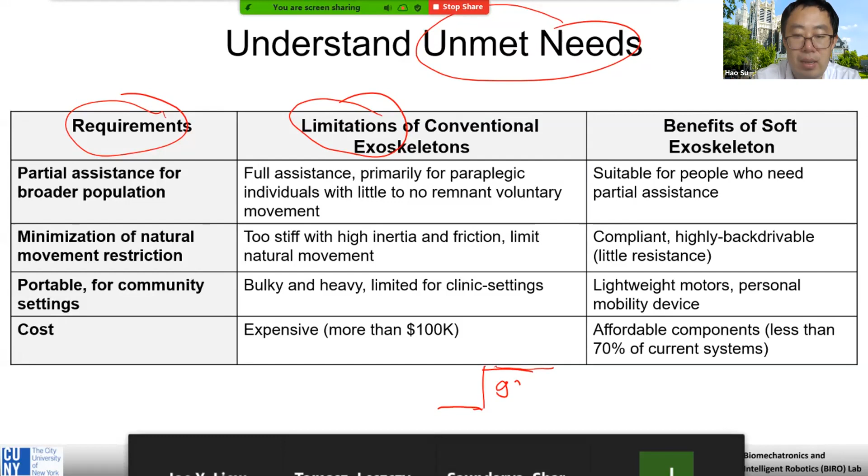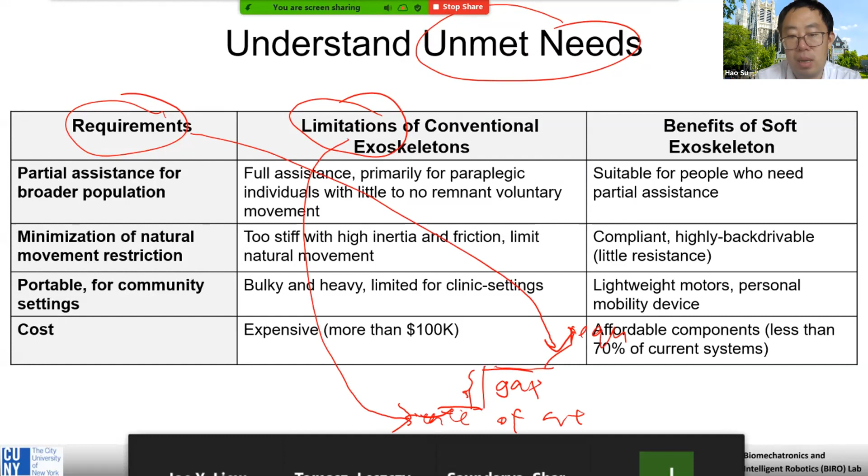So this is kind of like the requirement, what do we want. This is the state of the art, the limitation of the current solution, and the requirement is this, what do we need. And the gap is here, and this is the technical solution. You need to come up with a solution to accomplish the project.

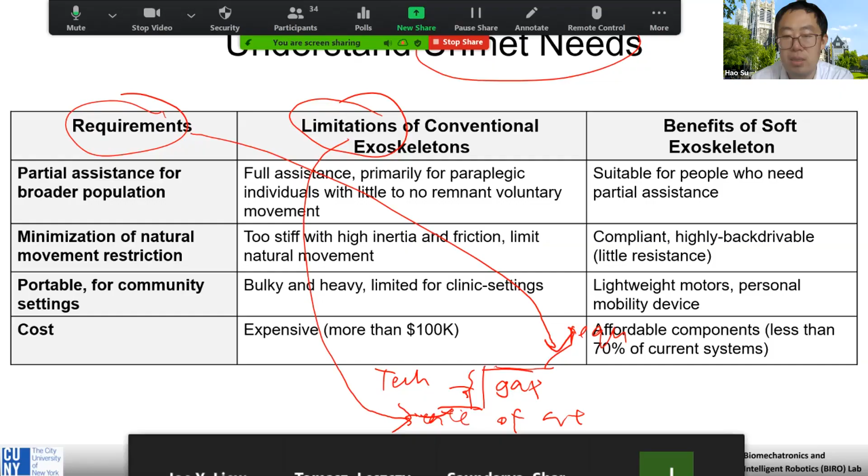I think I'll stop here. Let's share the screen with you again. I'll stop here, but I want you to watch a video, a very cool video from one professor. I think this could be a very cool video.